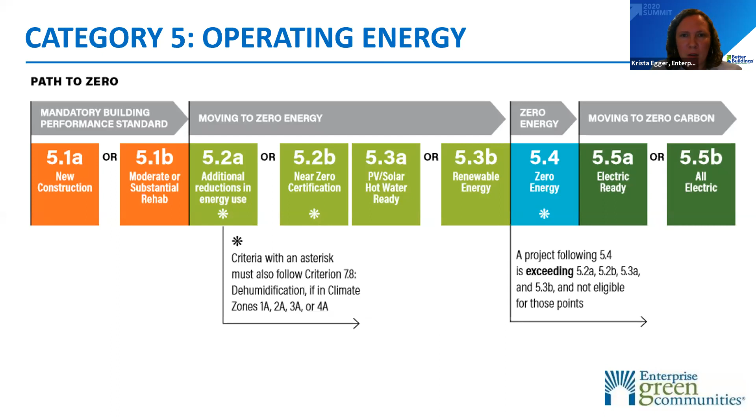I'm going to move on to category 7 with the next slide, which is about healthy living environments.

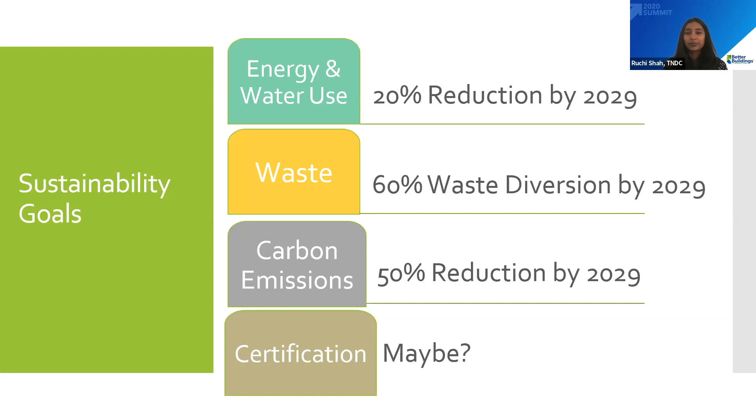The way we look at green and healthy building standards is that we look at baseline standards. For us, that has been GreenPoint Rated, which is very similar to what Krista mentioned with Enterprise Green Communities, but this is more of a California-based standard. It is free, though there are costs associated with getting consultants who can help us meet the standard. And LEED, traditionally in affordable housing, we do think it could cost more, but we have identified ways that it's either cost neutral, or given our higher design standards in San Francisco with the building codes, we are able to pursue that.

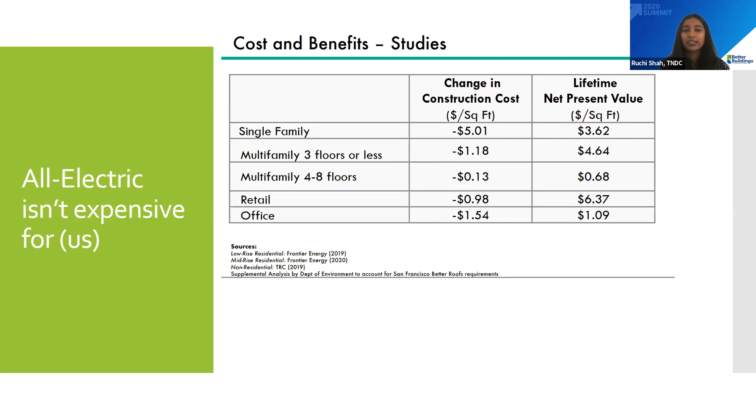From our lessons learned, what I really want to highlight is what not to do. If you want buy-in from teams on all-electric, don't talk about this later in the design phase, but rather talk to the teams really upfront, even before the schematic design phase, to share that we want to build this, so they can optimize and do value engineering on other aspects of building construction. In terms of what to do, it's really about getting the right consultants on board who have familiarity with heat pumps or whatever other technologies you're looking at for your projects.

And then really highlighting the fact on commissioning. None of our all-electric buildings is fully built out yet. Many of them are in later design phases and will be breaking ground by the end of the year or so. So we are tightening our standards on commissioning, because we want to make sure all of our design assumptions are actually true once it goes into operations.

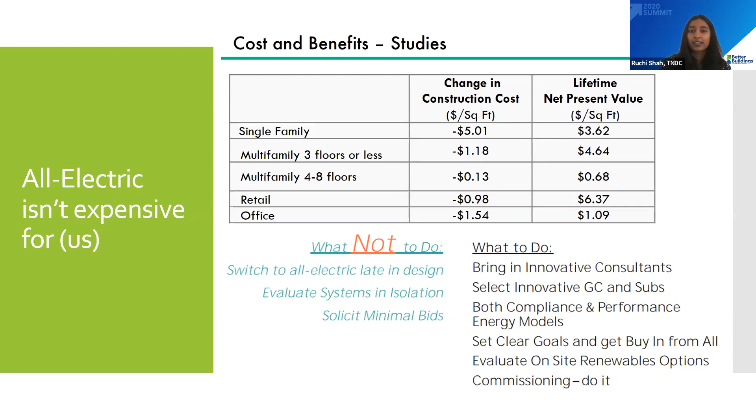Another strategy that Krista did mention in her presentation was embodied carbon. It's such a broad area, and a lot of research is coming out, but given that we have 11 new buildings and we don't want to miss out on that opportunity, we are taking baby steps too. Embodied carbon, in a sense, is the carbon footprint of the materials that go into building design and construction. Let's watch a quick video to get everyone on the same page on why it matters.

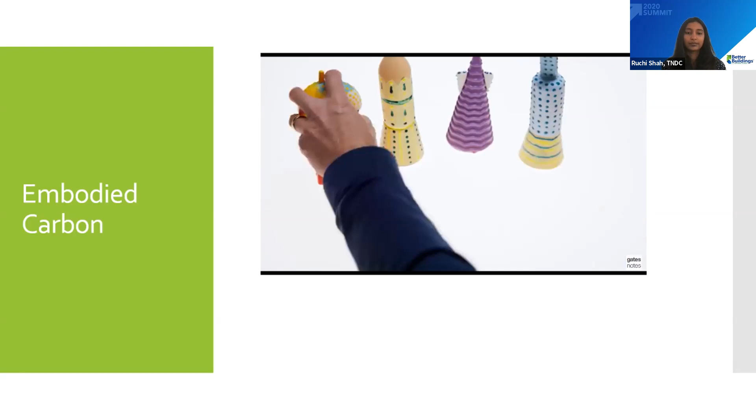Well, let's talk about climate change. Now, people think, hey, aren't solar panels and windmills getting a lot less expensive, and isn't that helping reduce greenhouse gases? And the answer is absolutely. But there's a lot more to do than just taking electricity to zero emissions. There's a variety of things that generate greenhouse gases. We have a lot of sectors of the economy, like manufacturing, that are emitting greenhouse gases that aren't talked about as much. Manufacturing, everything we make, even a cute little squishy like this, is emitting 31% of greenhouse gases. The number of buildings in the world is going to double by 2060. It's like we're going to build a new New York City every month for the next 40 years. It's a gigantic amount of materials - steel, cement, wood - all emitting greenhouse gases. We're going to have to figure out how to make all these things in a different way, and we're going to need a lot of change, a lot of innovation to bring the emissions from all those areas down to zero.

I hope you all feel the same after watching the video, that new construction is an opportunity we really have to grab onto, and we are all expanding pretty quickly, and the emissions associated with that - just because we don't have correct metrics right now or lack information - does not mean we cannot act on it. Based on our engagement with the Carbon Leadership Forum, as Krista mentioned, they're a fantastic resource if people want to learn more on embodied carbon. What we are trying to do is tackle the upfront aspects of embodied carbon, because most of the work I shared earlier, and what we've been doing with the Better Buildings Challenge, is on operational carbon - energy efficiency and reducing what happens after the building goes into operation.

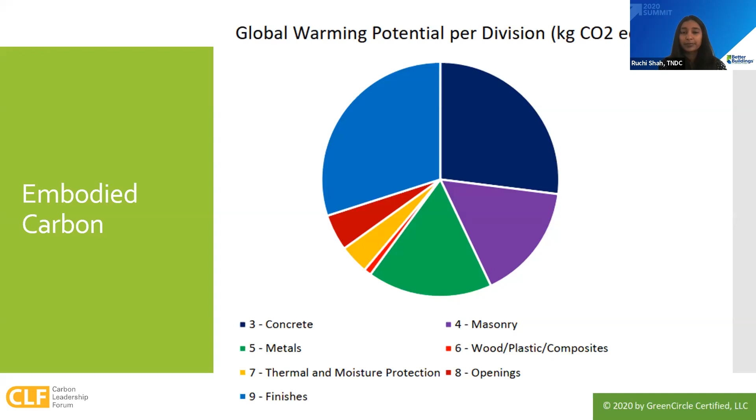We took up a small exercise to understand one of our latest affordable housing projects, 1036 Mission. It's 83 units in San Francisco.

How our current concrete approaches fare in terms of embodied carbon impacts. So we worked with the consultants to look at our concrete mixes and talk to our structural engineers to understand what went into that building. We looked at different aspects where concrete went in, such as foundations, slabs, walls, and we realized that by not doing anything, just by virtue of design, we had a 14% reduction compared to a similar baseline building.

And the key source behind this analysis was environmental product declaration data, EPD, which again comes down to the point of how we can make sure that we are getting this data upfront. So it's about transparency in these materials.

Even though our current building is 14% less in terms of embodied carbon for the concrete aspect, we realized that there was a lot of opportunity we did not take advantage of. And we could fix that by tightening up our concrete standards.

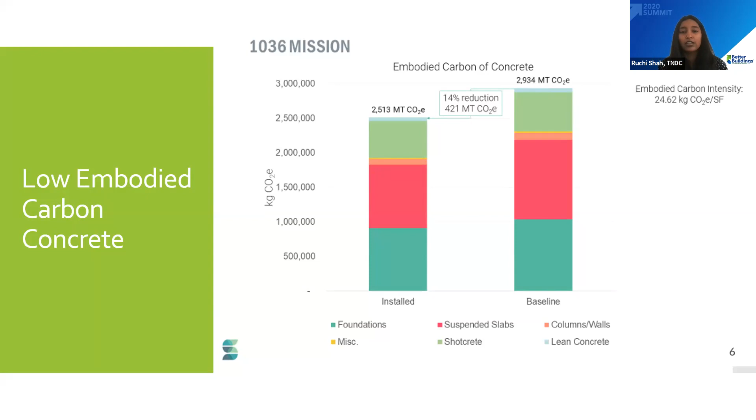So this is a draft, and I would be happy to share as things get more solidified, but we worked with our structural teams to figure out what we can do for better concrete standards in terms of low embodied carbon. So just to set the baseline, when we talk of concrete, there are three big things that come into play: cement, water, and coarse aggregate. And it's all about different proportions that we use to reduce embodied carbon.

In cement, as you can imagine, the emissions associated with extraction and manufacturing is the biggest culprit here. So for example, on the table here, for slab on grade, we are now recommending 70% SCM, supplemental cementitious material, meaning we'll only use 30% cement and 70% will be the other components. This is still a work in progress and a baby step, but we feel given the type of construction we are doing, this is a good first step in the direction of reducing embodied carbon.

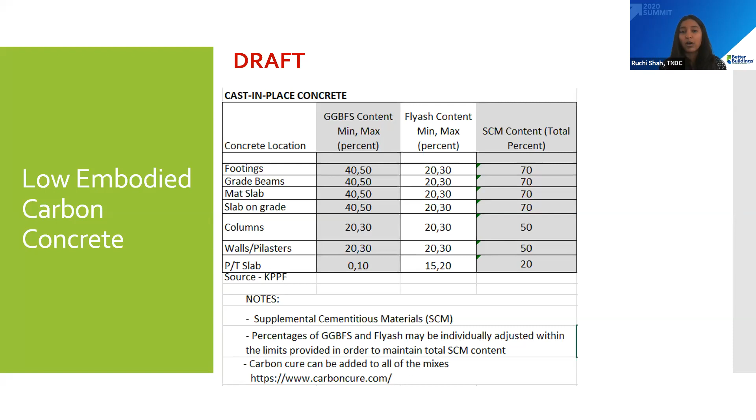As you are thinking to start this conversation in your organizations, I think you could start with some basic questions on what to even ask for. The table I showed focuses on the question: can the amount of cement be reduced? And the answer, when we worked with our structural teams, was yes, absolutely.

And our fear was, would it cost more? If you think about it, technically it should cost less because we are using less cement, or maybe cost neutral if there are challenges with getting the right amount of supplemental materials. Again, engaging with structural upfront, and even just sharing that we want to reduce embodied carbon, can help them think about reducing the overall mass of concrete in the project.

Can we use other materials? So we are starting to ask these questions, and in no way or form are these a final list—it's a growing list—but having these conversations is helpful.

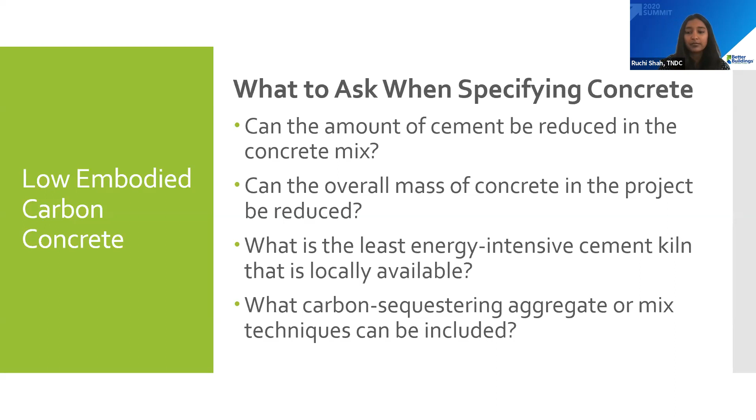We built out this chart with our consultants so that it was clear for our design teams on what the approach should be and how they should talk about embodied carbon in concrete. Traditionally, this has been a linear approach: there is a design team, there is a construction team, and we as owners sometimes bring them together, sometimes we don't. Especially when it comes to carbon reduction strategies, it's important that structural engineers talk to the entire construction team, and there is a lot of open communication that should happen to achieve this.

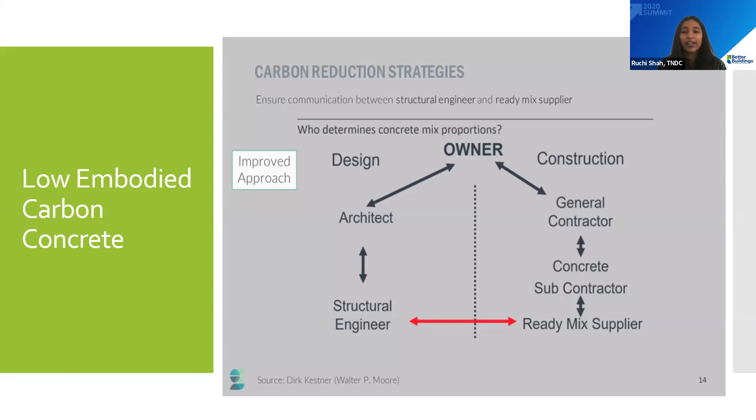So with this, I want to end my talk by saying that it is scary. We are embarking on a lot of new approaches and pushing our envelope beyond energy and water efficiency. But I feel like just being hopeful isn't enough—we have to start somewhere and take action. So I hope this has given you some food for thought, and I'm happy to talk more on any of these topics in more detail. Thank you.

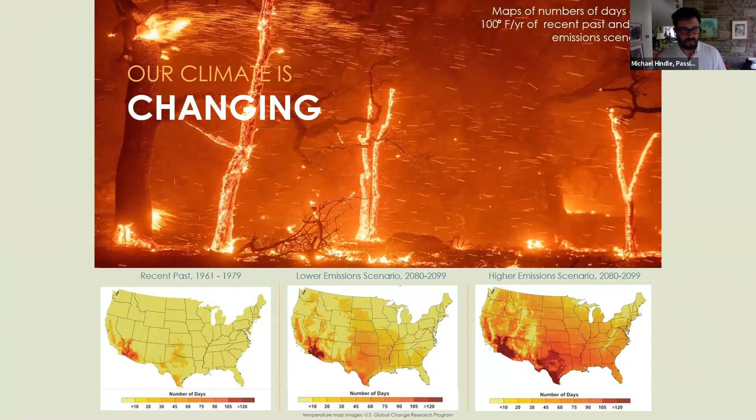Since we're talking about buildings primarily, though I know Krista is absolutely critically correct in talking about a broader, more holistic perspective, and I hope to address that as well. Buildings play a huge part in what is already the worst per capita performance in carbon emissions in the world. The United States is the worst, and buildings are 44 to 50%, depending on who you ask and what's being measured.

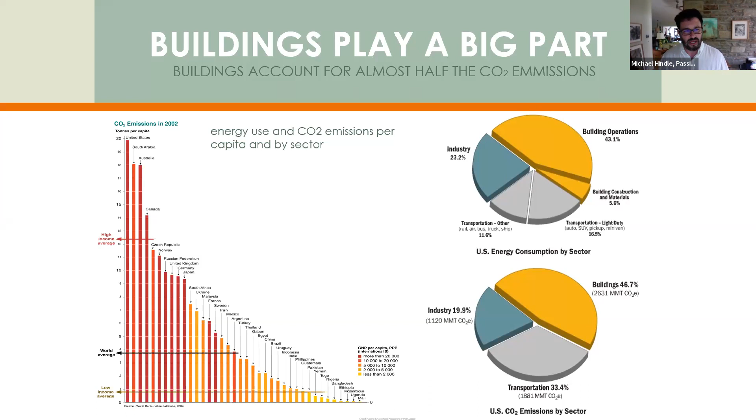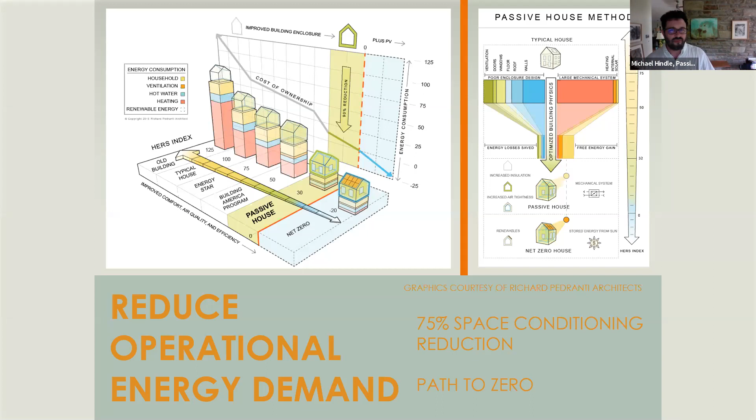So we have to reduce operational energy demand. Now, how do we do that? Passive House is focused on energy performance and the building envelope. Simplified, replicable, high performance assemblies require that team that you've pulled together to be committed, as I said before, and truly collaborative. So integrated design is not something that Krista says or a box you check off. She's trying to get you to actually do it.

That means that everyone from the developer, and I'll mention several that are really playing ball with us, doing and leading the way, from the developer, the architect, the structural engineer is critical. The interior designer is critical, as Ruchi showed. The carbon intensity of the interior finishes can be very high. In any case, you need everyone at the table sharing this goal from day one.

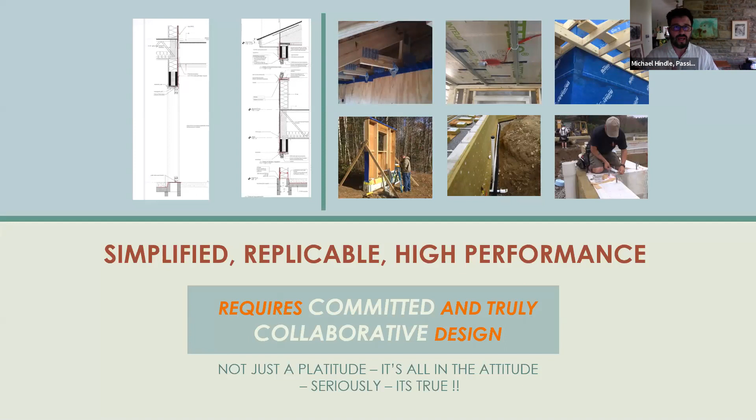And the people who set the tone, generally the developers, the owners, have to, rather than be saying, well, it'd be great if it doesn't cost too much, they have to be saying, this is what we're doing. You're my team. Find the way and work together and work it out. So it really is collaborative.

This is Gilford Village Knolls III, the first Passive House multifamily in New Hampshire, which we worked on. This used basically off-the-shelf assemblies. It's just 2x8s. Everyone said, well, you need to have continuous insulation in order to do Passive House, particularly in a cold climate like New Hampshire.

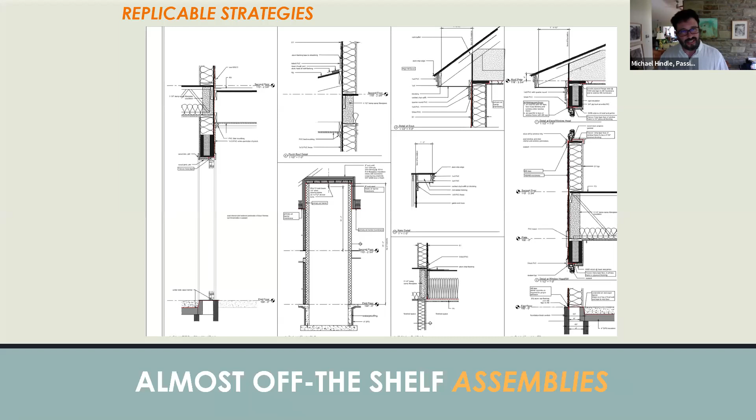I said, no, let's model the building before we draw that conclusion. We found that we could build with 2x8s. We overcompensated a little bit in the slab in the attic, but these are simple assemblies that the framing crew already knew how to do. There were a couple of nods to airtight continuity and sequencing that we had to clarify early, so we did, and we did not have a problem. And it was a low bid, New Hampshire's a low bid state, so going off the shelf as much as we could was really critical.

Right now, we're working on several projects in Washington, D.C. and in Pennsylvania. Preservation of Affordable Housing is the developer on this project. In particular, the leadership of Julie Klump has been incredibly important. We have 3 buildings.

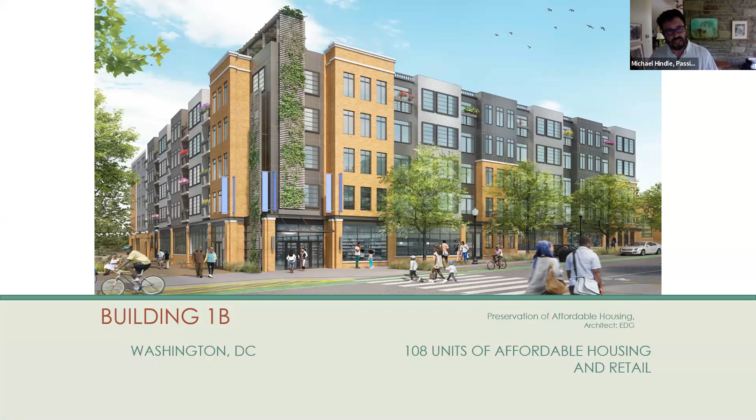That one you're looking at now is, I believe, 108 units. This one is 134 units. And the third one is 196. In any case, we've got 3 large buildings that are all targeted Passive House, no questions asked, just do it. And there's going to be a group of row homes as well in this neighborhood eventually. By setting the tone, POAH has said this is the new standard. We can achieve this. Now team, get down to work and do it.

So you really have to thank them for their leadership, really, in all of this.

Now, the assemblies in this are actually, again, very simple. It's 2x8 construction with vapor open sheathing to allow for outward vapor migration. In some of the walls, we have a furring cavity inside to protect our airtight layer, but we've subsequently modified that, and it's not necessary everywhere.

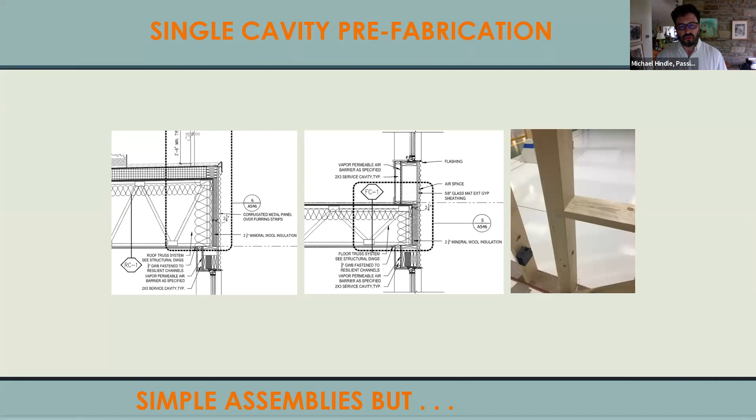We're also able to go with a simplified and prefabricated model using, currently we've been talking to Blueprint Robotics. The picture on the right is just a shot from their factory. So these assemblies are really simplified and the performance is great, and there are no thermal bridges in the upper structure of the building.

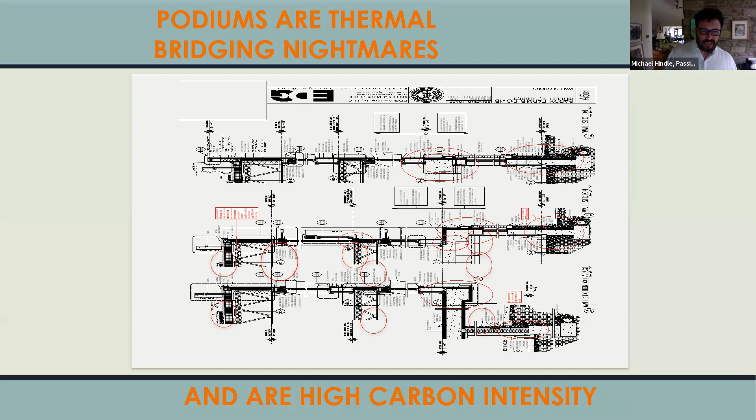If you say, okay, here's what we need, and then it goes to the architect, and the architect goes to the structural engineer, then the structural engineer comes back to the architect, and then they get back to you, you've lost an incredible amount of time, an incredible amount of simple, direct solution providing, like in real time, in person, or virtually, as it is now.

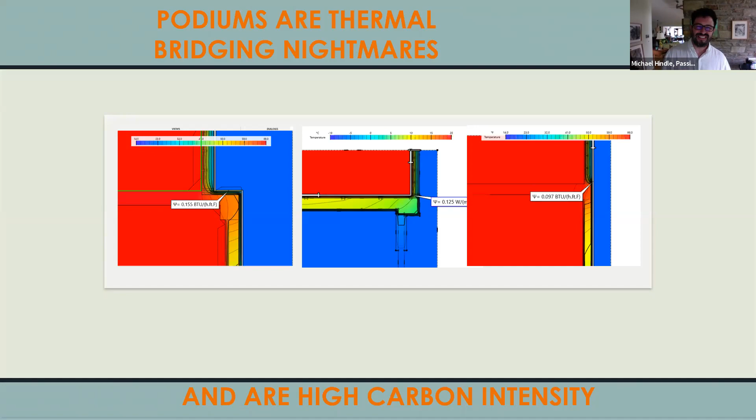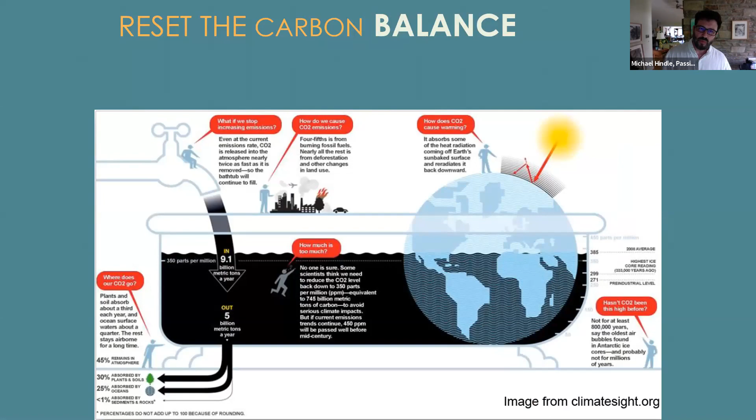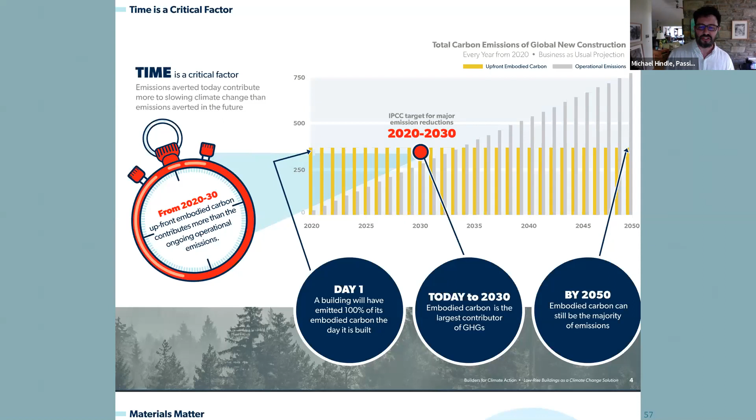So if we're going to address climate change, we simply have to address embodied carbon now. This has already been discussed, so we can move on. Ruchi's already described some different strategies and shown different materials.

This is from Jacob Racusin, Ace McArleton, and Christopher Magwood at the NESEA conference a couple years ago. On the top chart, first scenario, they built a typical code-built home, and you can see the embodied energy is low. Each little red tick is operational energy per year. The purple is the total aggregate carbon emissions by 2050, and this building is responsible for 84.8 tons of carbon emitted by 2050. Bad. That's really bad.

Now you do a zero energy or high performance building with a heat pump, but you use carbon intensive materials like lots of foam, concrete, steel, etc. I don't know the exact prescription they had, but the embodied energy is very high and the operational energy is negligible, and the total carbon emitted by 2050 is 91.9 tons. In other words, doing a high performance building, as many well-meaning passive house communities have been doing, with lots of foam, delivers a worse carbon outcome by a good margin. This is even worse than our first scenario.

Our last scenario is what Jacob and Ace practice up in Vermont. They were using biogenic, carbon-sequestering materials. This is a model, but they do this in real practice too. They build the building and it sequesters a whole bunch of carbon, then has very low operational energy demand. At 2050, you've still stored 8.9 tons of carbon. This is what everyone needs to do now.

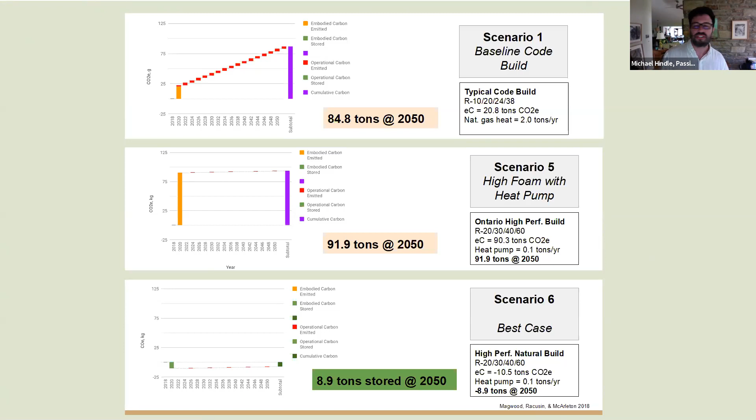Now, it's easy to say, and I used to say, things like 'incrementalism is death, we're never going to get there.' But that lacks humility, because the work Krista and Ruchi have been doing within their organizations, and so many others on this call, doing it incrementally, has been proving the concept and making it possible for us to envision the green image on the right. We have the same building built four different ways, and this building can be an asset to the environment, not just less bad.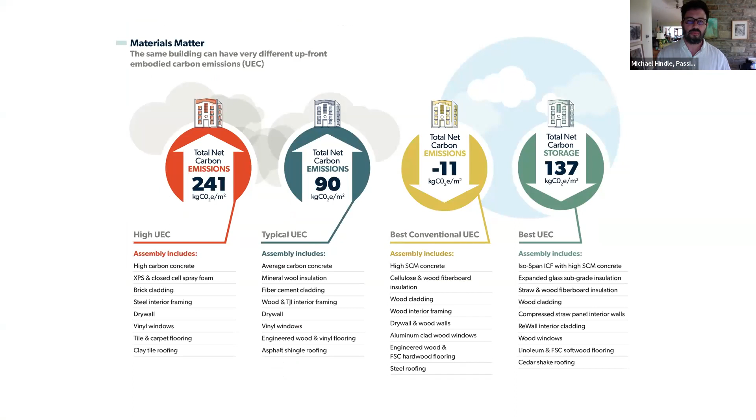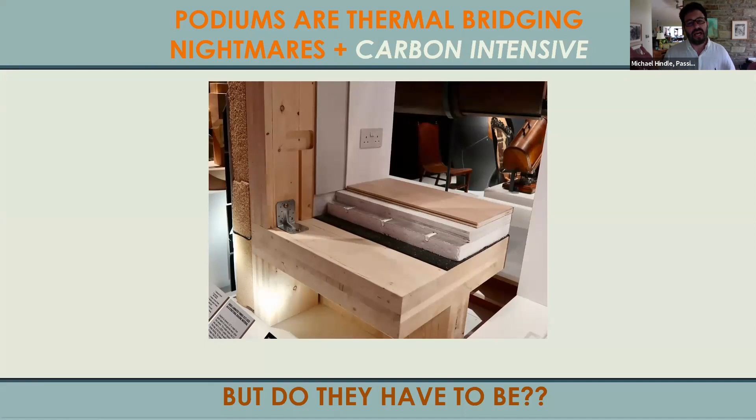This is the mantra: not just less bad, actually become an asset, an improvement to the environment you're working with. I'm talking fast because we don't have much time, but okay, podiums. I said they're thermal bridging nightmares. True, we can resolve it, but it's still hard, and they're carbon intensive. But do they have to be either of these things?

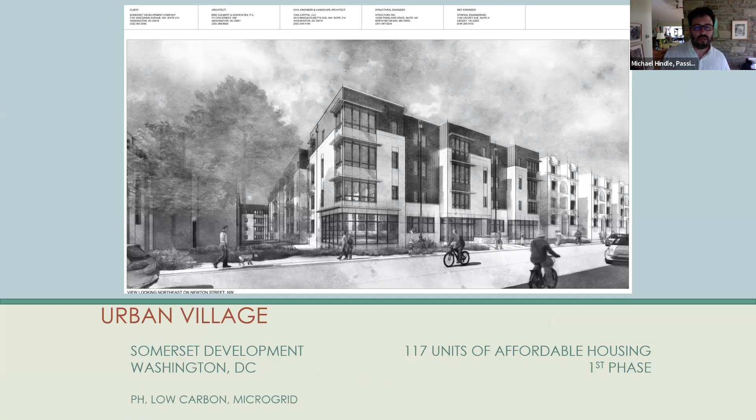The answer is it's all about the team, and it's all in their attitude. We see a project in DC with a group called Somerset Development. The developer, the architect, and the structural engineer all said, okay, what if we try this? I suggested mass timber instead of concrete for the entire podium structure. They said, I'd love to do it, let's try it. And no one on that team wasted our time arguing that we couldn't do it.

Now, I know there are sometimes very legitimate reasons why you can't do things like this, so please don't misunderstand me. But since everyone had the positive attitude of 'can we do it, let's find out,' with a hopeful orientation towards that goal, we solved it. We got rid of all the podiums. There wasn't much in this project, not as extensive as on some other projects, but we also looked at the masonry stair tower and elevator shafts, and they're gone as well. So now this project is made out of mass timber and CLT for those critical structural elements, which otherwise would have been concrete. There's still concrete for the foundation, retaining walls and such, but the percentage of concrete in the project overall, as per Ruchi's point, has been dramatically reduced.

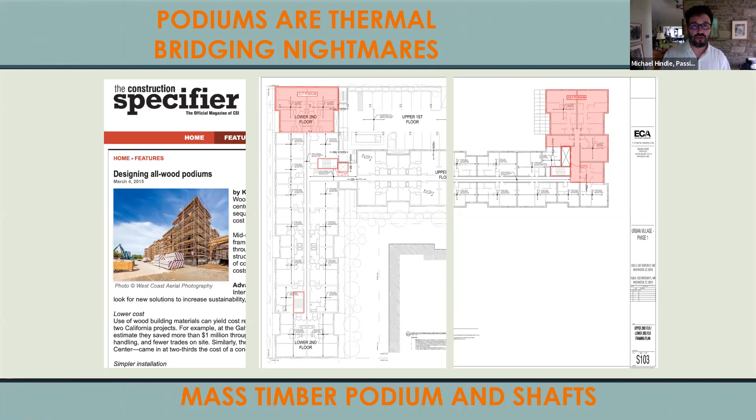So we have to be building with regenerative materials. This is Martin Lettenmayer from Blueprint Robotics, who we've been working with, POA and with Somerset. These are just a couple shots of their walls. The wood fiber insulation on the exterior can be a net carbon sequestration. The wood timber in their shop is sustainably harvested.

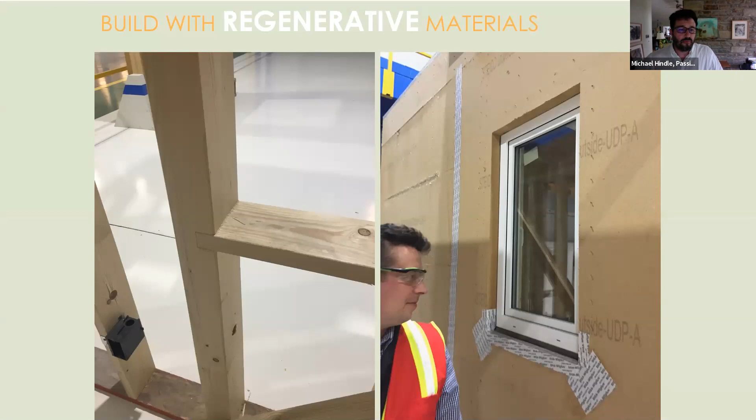Unfortunately, they have to go to Europe to get it, so the carbon footprint reduction isn't as great. But we can put pressure on our respective industries to get there. Next slide. All of these solutions are here now, every single one of them. We have to choose to find the way to employ them.

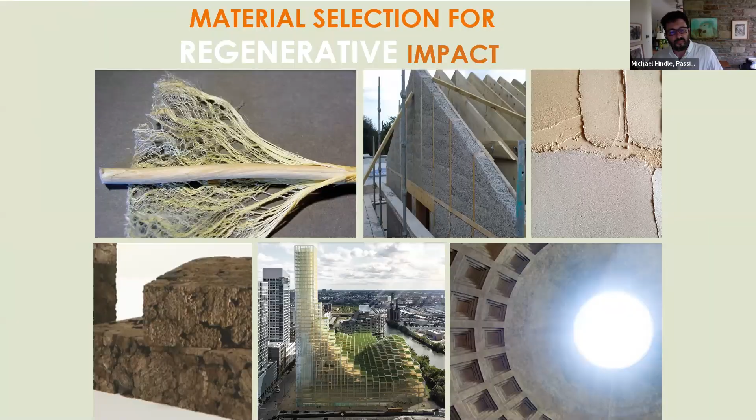Next slide. I have cork on my house. We're talking to some people about using hemp on a retrofit project. I'll get back to that in a sec. In this chart on the left, you see operating emissions for new construction. Ruchi's absolutely right, every project has to be the highest ambition we can make it. But operating emissions for new construction is a tiny fraction of the overall carbon emission sources. Embodied emissions of new construction is higher, but still relatively small.

We'll look at the operating emissions of existing buildings. It's because there are a lot more of them. Most of the buildings already exist, and they're very poor energy performance. Now, every time I drive into DC for a project meeting, I see all the buildings going up around me are carbon nightmares, both operationally and embodied. But you cannot build your way with low carbon materials out of the carbon crisis. We have to retrofit our way out.

So if you look at the right chart, large heavy buildings are responsible for a very large amount of embodied carbon emissions. Small light buildings less so, but renovations are the lowest still. So that means that our lowest embodied carbon solution aligns with our greatest operational emissions challenge. There you have opportunity aligning with the need. So we must retrofit.

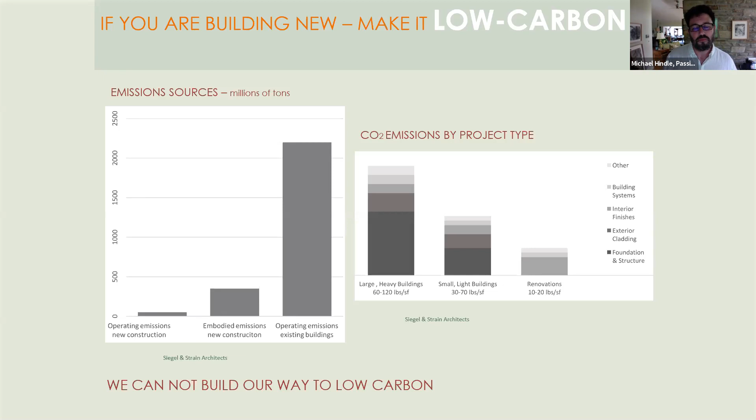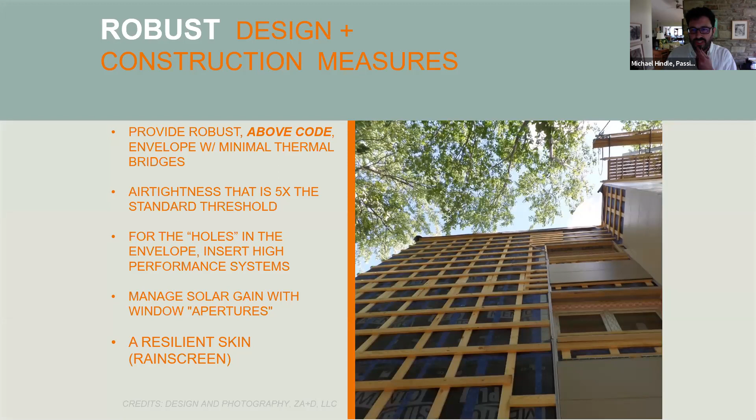Next slide. This is Weinberg Commons, mentioned before. This next slide was a deep energy, exterior deep energy retrofit of brick and block housing project buildings. Next slide. I don't have time to go into the details, but I'm happy to answer questions.

This is North Negley Ave. We're working on this project with Beacon Communities. They were going to tear down all of this, save the portico as a relic, because the builder and the architect said it would be cheaper to build new. These buildings are precious. This is part of the cultural fabric of that community, and the embodied energy sunk into this project already is enormous. So we convinced them to take a look at it.

They are now preserving the entire building. Now, certain things like a collapsed roof or water damaged plaster coming off still need remediation, but all of the main structure is being preserved, and we're building two new stories.

Next slide. So you'll forgive this rendering, because this was just sort of a sketch one of our team did to represent the idea that Krista suggested is important, which is an entire regenerative neighborhood or community approach. And so we are using all carbon sequestering construction materials. We have gotten all foam out of all of these projects.

We are doing the deep energy retrofit of both parts of the building. The residence is a LIHTC project. And again, if it weren't for Courtney Kozlow, the development director, none of this would be happening, because I can kick and scream and stamp my feet and wave my hands and say I'm a green guy and you got to do these things, and no one's going to listen to me. It's got to be the leadership. I can help make suggestions, but your green consultant needs to be backed up with solid concerted leadership from the ownership team, the development team.

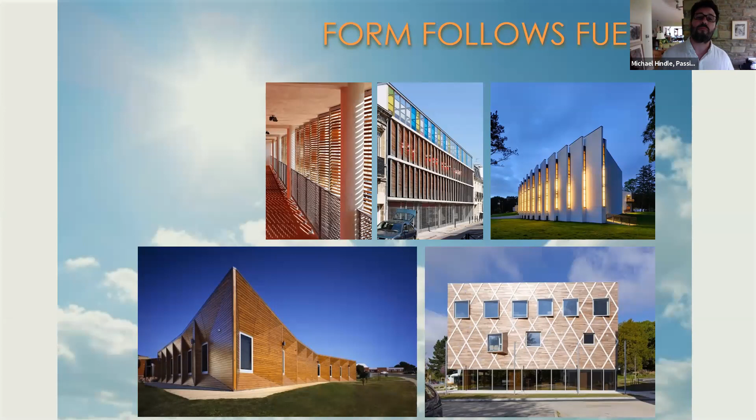There were rectangles around the windows that provided excellent shading. You could even see the shading in the picture. So form follows fuel, not just function.

The great news is our house, post retrofit, our son is thrilled that the solar panels are there. If you do the passive design first, then the deep energy retrofit of the envelope, then active generation, this is the path to both zero energy and resiliency.

This is Weinberg Commons in the model, with the heating and cooling, the heating system turned off in the middle of winter. The temperature never dropped below 60 degrees. We could power this building with the solar panels, basically for critical loads, and never need heat, because we actually just don't need heat. Now, it's a little colder than people like it, but it's not a risk to the community. So resiliency can be a very real thing if you focus on passive design in the envelope.

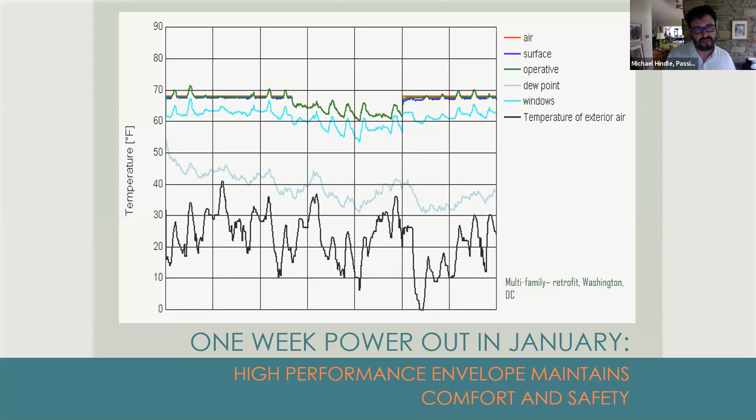This is just an example. If you add solar and some storage, the sun comes up, which is the yellow line. The blue line is the battery charge, and the battery discharges overnight. And boom, the sun comes up again.

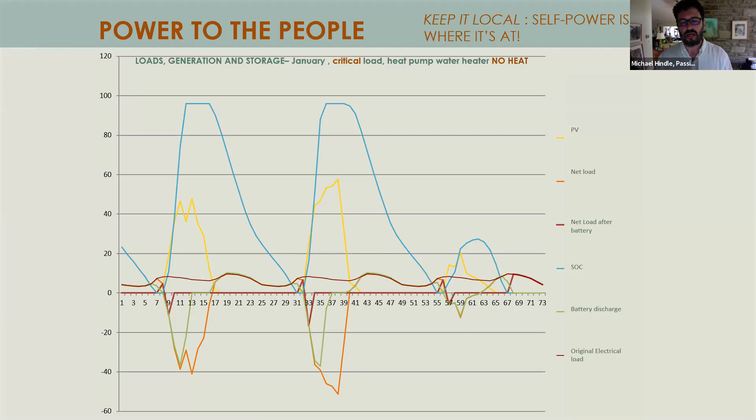This building in the middle of January in New Hampshire was self-supporting for critical loads, mind you, not all loads, but critical loads, with just 2 electric vehicles plugged in as batteries. Bidirectional charging is coming, so that'll be cool. This is good grid citizenship.

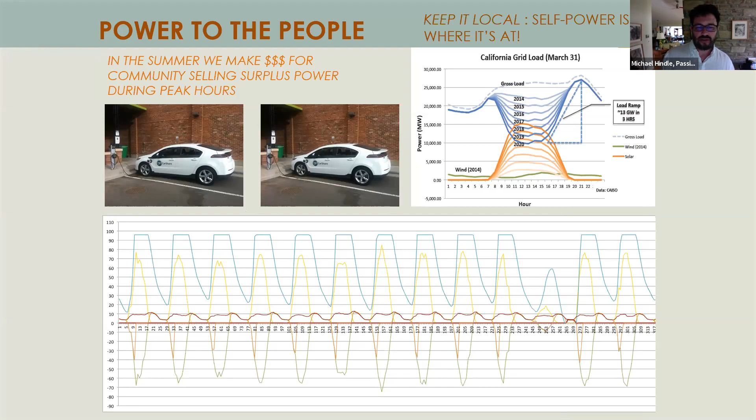If you haven't heard of the duck curve, you will soon, and you can look it up. But basically in August, this battery system never goes down. This building is completely off grid.

So this is a far better investment. Everyone's going to say, well, what does it cost? This is a far better investment, whether the markets know it or not, than the $1.5 to $2 trillion we're going to spend updating the infrastructure just to maintain a destructive system that we currently have in place. Think of what we can do with that investment.

This is all about you. It's all about me. It's all about every one of us that drives a car or owns a house or does anything. We all have impacts. We all have to make the commitment now, and we have to lead.